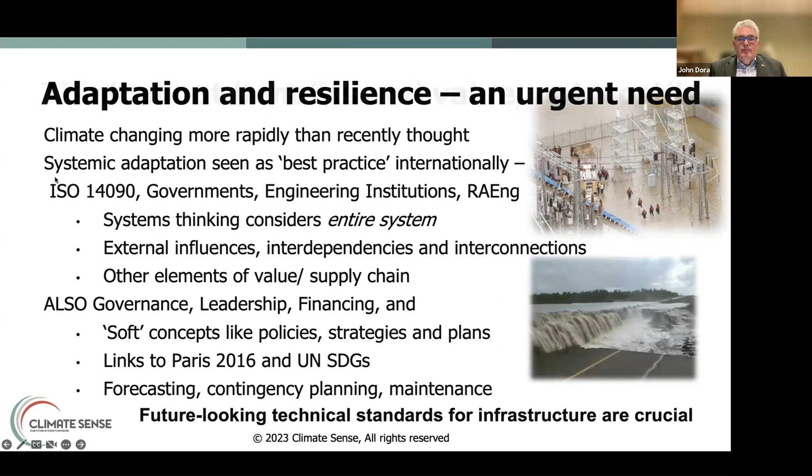Another thing I think about in terms of adaptation and resilience building is to change the mindset. I've worked in infrastructure maintenance, both in railways and in flood risk management in my career. And most of the time, we're concentrating on cost. Now, cost is a concept. The first initial cost is something that drives, to my mind, lots of project engineers. But if I look at things like ISO 55000 and other good asset management practices, I start looking at whole life value, not at cost.

And something that might appear expensive, and that's a subjective term, expensive, when you're designing and building something might add value over the longer term. Something built in to make a set of assets easy to maintain, for instance. People might cut that out of a project and make it cheaper for delivery.

But being a person who's cut his teeth on maintaining lots of ancient 200-year-old railway assets and 50 to 100-year-old flood risk management assets, maintenance to me is the thing you need to invest in. And the maintenance and operation of infrastructure, of transport assets, is giving you the early warning as to how things are behaving, how things are deteriorating. And that's something we need to think about in terms of climate change.

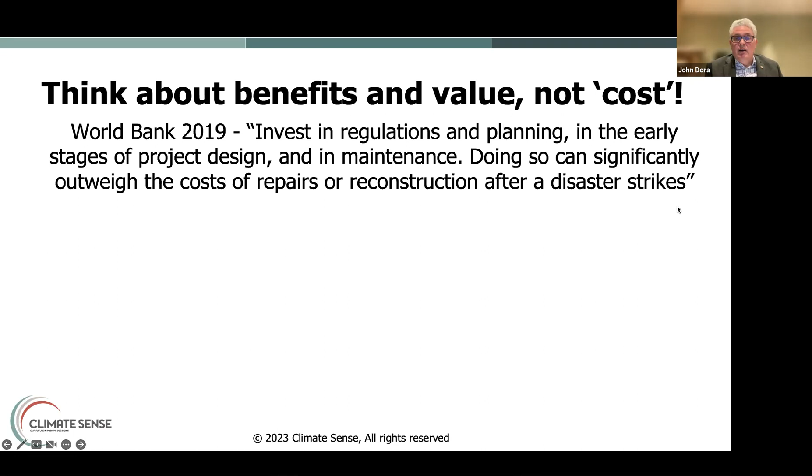So just a couple of things here. The World Bank, again, talks about investing in regulations and planning in the early stages of project design and in maintenance. And they're talking about how, with disaster resilience, building in good whole life thoughts and maintenance in the project design phase is really good practice, because it can outweigh the cost of repairs. Design things to fail gracefully, not to fail catastrophically, which is what I think we've seen recently in Turkey and Syria, sadly, with corners cut and infrastructure collapsing with an earthquake when things should have been more robust.

Two thirds of the infrastructure needed for 2050 is yet to be built. Again, the World Bank brought this up at COP22. So if we've got to build something, let's design them with the future climate in mind. There was a climate change risk assessment figure in the UK two years ago that said investing in adaptation can pay back up to £10 for every pound spent.

So the World Bank is saying four times as much. Climate change risk assessment is saying up to £10, up to ten times as much. There are drivers there for spending money on resilience building. Change the mindset, think value, not cost. Whole life cost, not lowest first cost. And challenge economics theories. This is something I talk about quite a bit to my students and others.

Our economics theories are based on future generations being able to afford more than current generations because of this concept of growth. Now, those of you who are into sustainability will probably realize that we haven't got much in the way of natural resources that we can count on to sustain that growth in the longer term. So I think the current economics theory, looking at high discount rates and financial calculations over 20 years, that sort of thing, is not actually valid for looking at long-term future resilience of any infrastructure, transport infrastructure.

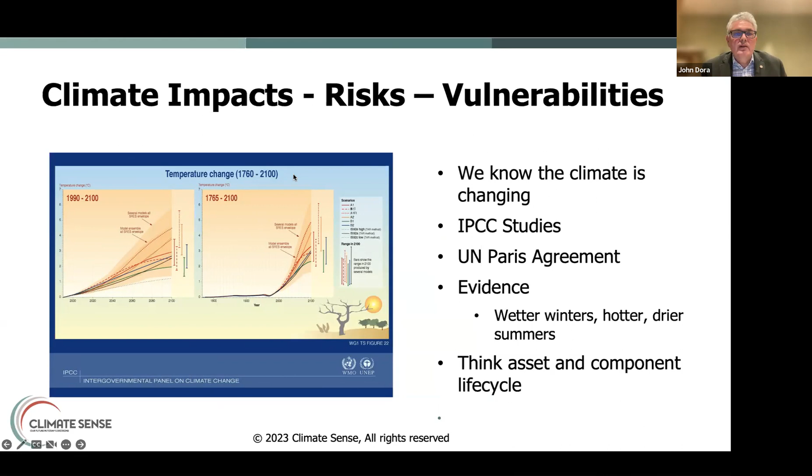If our decision makers understand how the climate is going to impact our infrastructure, the assets, how they might behave, we can build capacity into the assets to make them more robust. But we also need to build capacity in decision makers to train them to understand that some of their decisions might have a long-term impact and we build transport assets to last 50 to 100 years.

And like I said earlier, I've worked on railway assets in the UK, which is where I'm based, that go back to the 1840s, 1830s. So you can build things with a design life, but you can keep them going for a long time if you maintain them properly. But you need to think about the future climate as well. How is that going to impact on assets?

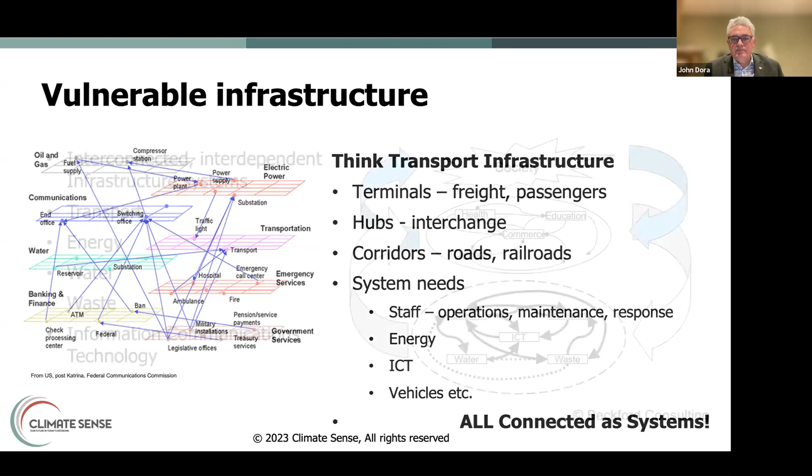What's vulnerable? Can you identify what's vulnerable? And how are they interconnected as systems? And I talk about systems quite a lot. I keep talking about it.

And this is a diagram from a friend of mine, John Beckford, who in a paper for the UK government about 20 years ago showed how society needs defense, health, commerce, education, and these sort of systems are all underpinned by infrastructure: transport, water, waste, energy, ICT. So transport's a vital link in the whole operation of society.

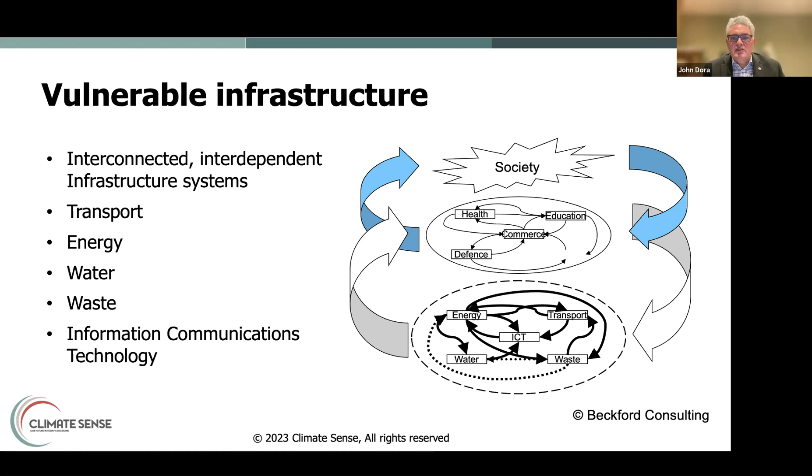So that's a rundown about future climate standards, systems thinking, and one or two other areas being into transport. Let's look at ISO 14090 and adaptation plans now.

ISO 14090 is not a standard that's been designed for just one organization and it brings one way of doing things. It's written in such a way that it's applicable to any organization of any size, of any sector. And depending on the audience, and because I live in England, I tend to point out it could be applicable to a cricket club.

And actually, last year I had an inquiry from the English Cricket Board about cricket, which is really bizarre. How's climate change going to affect cricket?

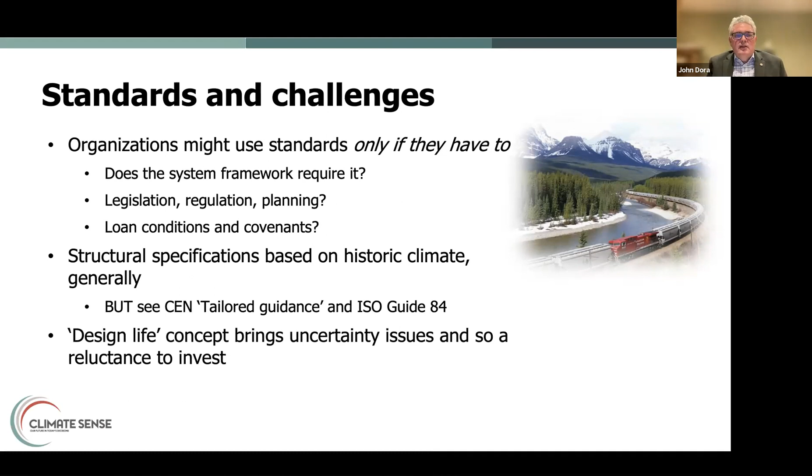The other thing I pick up on is when you design infrastructure, you tend to design it for a design life: a bridge maybe 120 years, or a drainage system maybe 60 years. This design life concept, I think, brings in uncertainty issues, because I wouldn't be confident designing a drainage system now for 60 years' time if it's got a 60-year design life. And because of uncertainty, that brings about a reluctance to invest. But there are tools to get around that, like adaptation pathways, which I'll touch on, as well as other approaches.

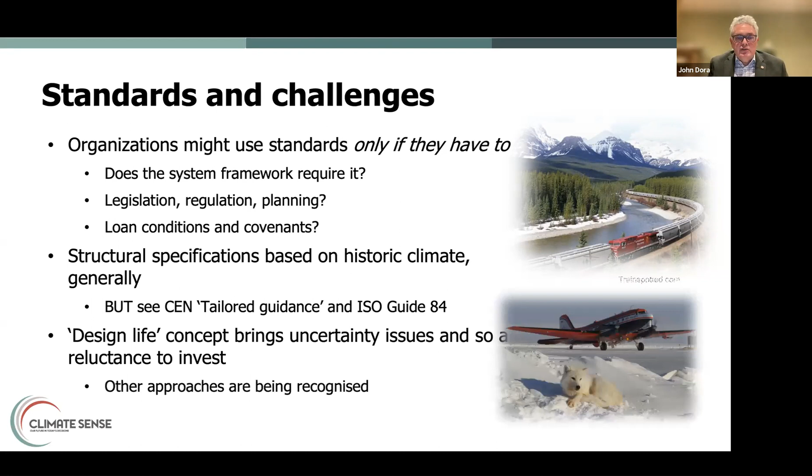So some of the opportunities in looking at transport and planning policy: avoid developing in exposed areas. And that's something that's come out of disaster risk reduction as well. Don't build in exposed areas. Don't build in eroding land around the coastline or in mountainous areas if you can. Don't build in floodplains. Review long-term infrastructure policies and strategies.

Think system and the interdependencies. Consider issues across all these interdependencies in terms of how robust your transport system will be if the energy system isn't robust. Need to think about these, think about supply chains, think about governance.

Now, managed adaptive approach, this is something that can be used using adaptation pathways. TE2100, by the way, is the long-term strategy for the tidal defences that protect London, the capital city of England, which faces tidal surges every so often. The Thames Barrier and the tidal defences were inaugurated, I think, about 1984 to protect London. And it took about 30 years to get that system in place. They're looking over the next 80 years as to how they will evolve that tidal defence system, with sea levels rising up to about 1 metre by the end of the century.

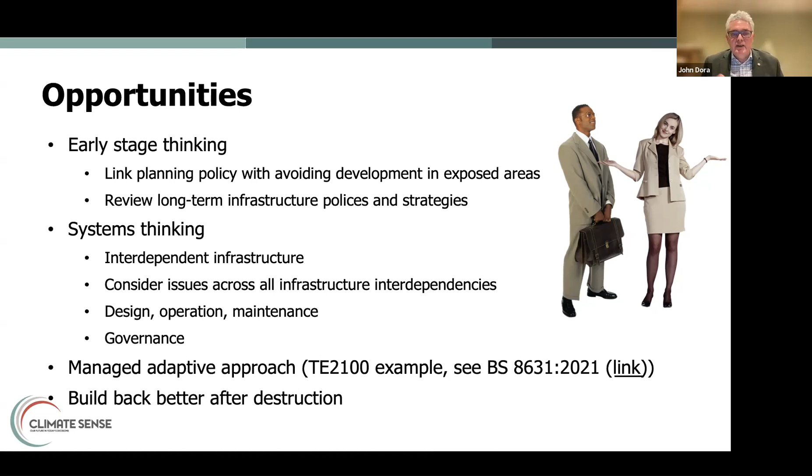And the last one here, an opportunity, is build back better after something's been damaged. Don't just build back and put back what was there. Build back better. Think of the future climate. That's an opportunity. Future-proof the whole system.

So some last thoughts on adaptation before I go on to a few case studies. Think about systems, think about criticality. Think about the interlinkages between different infrastructure systems. 14090 recommends using systems thinking to scope the adaptation plans so all areas are addressed, like the long supply chains, like thinking in terms of uncertainty and how to deal with it using adaptation pathways, prioritizing things that are most critical.

Good planning practice, touched on this already. Look at planning laws, reduce exposure to hazards, think early on in the project phase. So design things with long life, whole life value in mind, not cut costs and make things cheap to build but expensive in the long term to maintain.

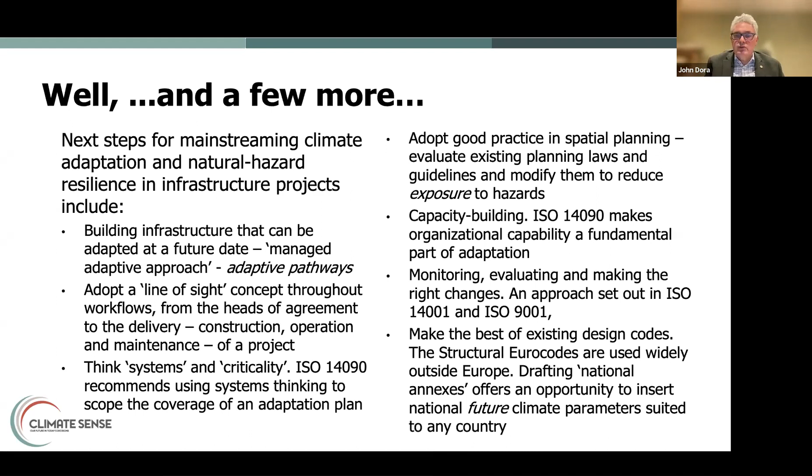I mentioned the structural Eurocodes. They've got a concept that has a national annex for every country, which gives us the opportunity to insert future climate parameters suited to any country. So there's a concept there that's been around for a bit, and that's the way the structural Eurocodes are being developed over the next couple of years.

So just have a short drink. John, just while you're pausing here before the case studies, just a quick update on the time. We have about 35 minutes left, just want to leave some time for questions at the end as well. Right. So 15 minutes for questions, 20 minutes, however many case studies you think you can fit in. Well, I'll rattle through one or two of these. I won't do them all because they'll be there in the PDF, but I'll just pick up one or two then, if that's all right. Perfect. Thank you.

Well, I'll start with Transport Canada, of course. Transport Canada has been incorporating elements of 14090 as part of its adaptation activities, and some key staff have undertaken training on 14090. And there's a link there that we offer training courses around 14090. A couple of years ago, I was involved in a bit of work with the University of Birmingham, looking at a policy guide for low-income countries on climate resilient transport, mainly for African and South Asian low-income countries. But the ISO 14090 framework was used as a core structure in asking questions and analysing the capability of existing policies. It was highly praised by the project group that steered that work.

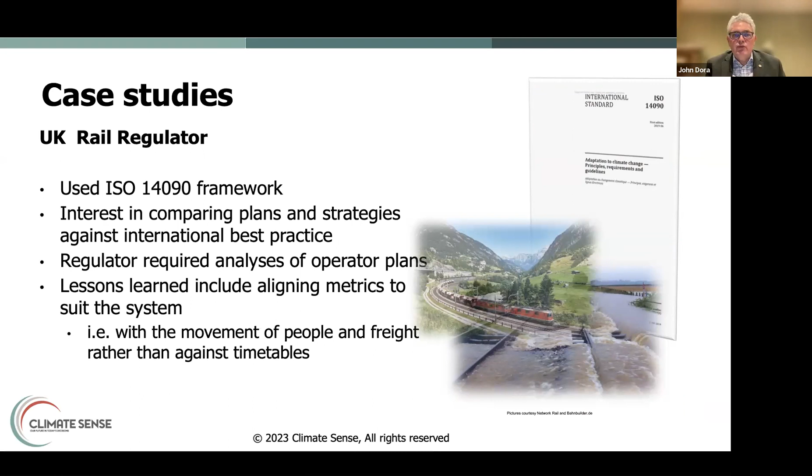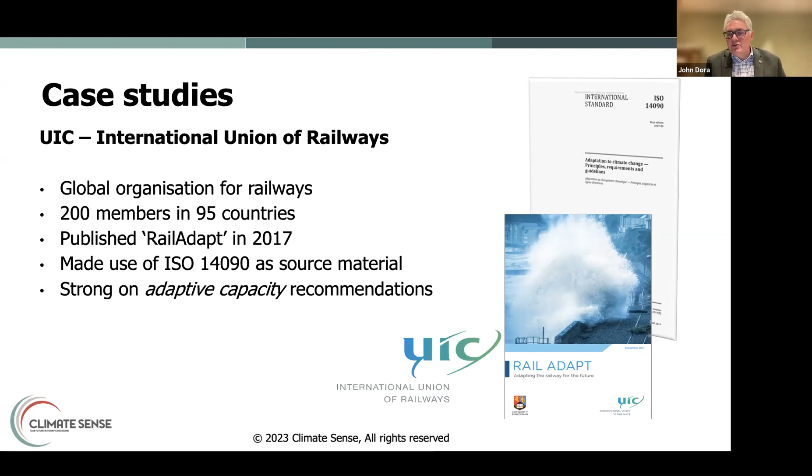The UK rail regulator have used 14090 as a framework to examine weather resilience and climate change adaptation plans in Network Rail, which is the infrastructure manager for rail in the British mainland. So 14090 was seen as a very good framework to look at what was being done. The International Union of Railways, and sorry, this seems very railway focused. I'm a railway person, but I've got one or two other things as well. UIC used 14090 as source material for this guideline on adapting the railway to the future.

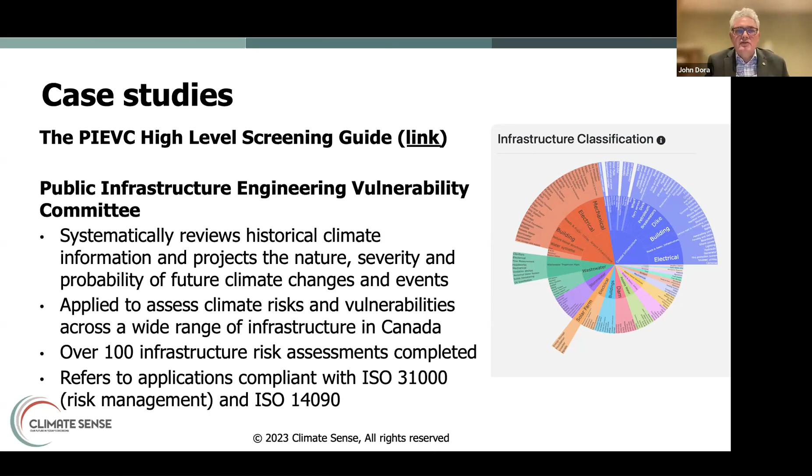In Canada, the Public Infrastructure Engineering Vulnerability Committee refers to having applications compliant with ISO 31000, which is the one on risk management, and 14090. So, these are all very high-level policy guidelines, and that's the way to start. If it starts at the top level of the governance chain and the regulatory chain, then it filters down, and 14090 gets used more and more by people at ground level. Again, the First Nations Infrastructure Resilience Toolkit cross refers to the PIEVC work, which again refers to 14090. And a couple of other things.

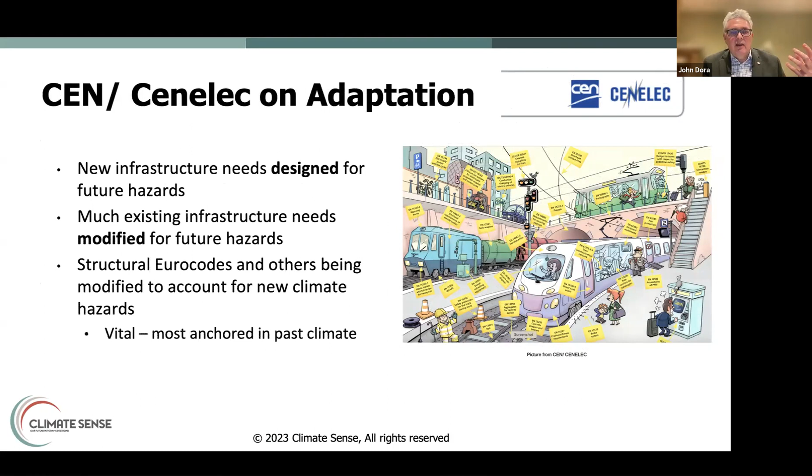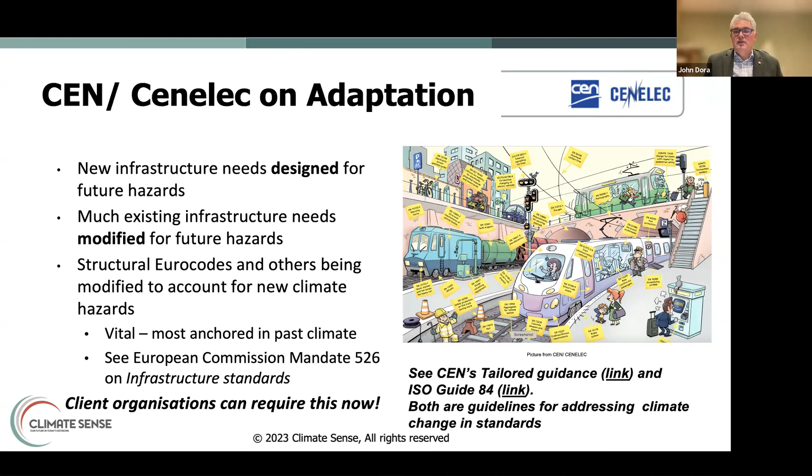The European standards body talks about infrastructure designing for future hazards, and I've said before that most of them are anchored in the past climate. There's been a mandate on infrastructure standards in Europe to look at changing some of these standards. But I keep coming back to this point that client organizations can require design for future climate now by using the right parameters. And CEN has got tailored guidance for helping standards writers in getting the right data. There's a link there to that. And ISO Guide 84 also has some guidelines for standards people to look for where the right data is for adaptation and for greenhouse gas emissions. Both these documents are free documents for addressing climate change in standards.